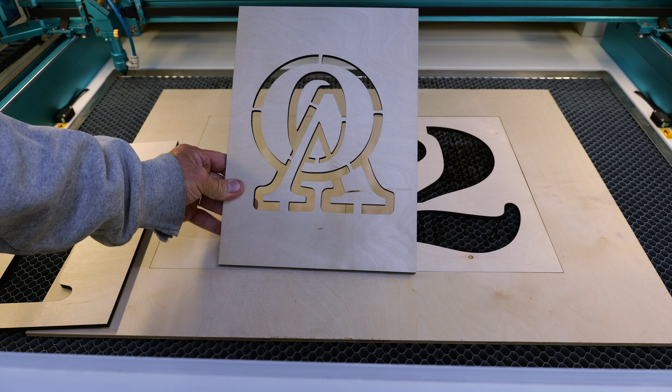The other thing I did was make a small logo that they could certainly put in here if they wanted. One thing I'll show you quick in LightBurn is how you take a logo or design and make a stencil out of it. The trick is you've got to put all these supports in, so when this is all cut out and you pick it up, it all stays intact. This is made out of 1/4-inch Baltic birch, and it seems to work out really well. You just need to make sure they know to store all this stuff flat, because if it gets warped, it's not going to do anybody any good.

So let's jump into LightBurn. I'll show you right quick what I had to do to this original design to turn it into a stencil, and that way you can give it a try.

So the first thing we're going to talk about is how to take a graphic and turn it into a stencil. This is a graphic that I normally use for all their water bottles and engraving other things. But when you make a stencil, you have to modify your existing graphic, otherwise when you go to cut this out, it'll all fall apart on you.

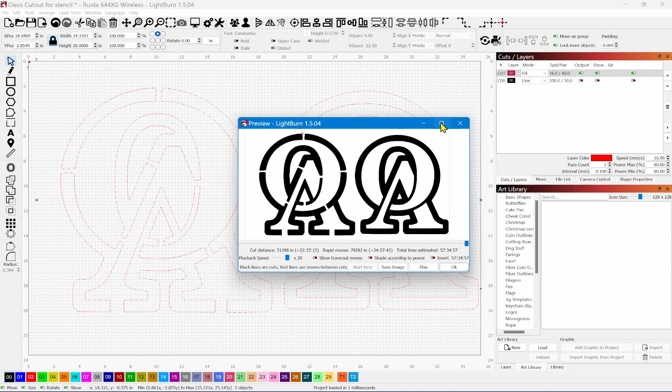I'll demonstrate that this way. If we highlight this, and I've just changed this to fill for demonstration purposes, we'll go ahead and look at both of these in a preview window. What you'll see is this is the way the school graphic came in. This is what I use on their sports bottles, that kind of stuff. Great for engraving. But if you tried to cut this out, what's going to happen?

Because nothing's connected to the outside. Just imagine that you're setting this graphic on a piece of wood. If I cut this out, this O would drop out, this piece would drop out, all of the parts in the letter A would drop out because it's not connected by anything.

So in order for you to do this and for this to work, you've got to understand how stencils work. I thought I'd show you what I had to do to this graphic over here in order for it to become a stencil, to where you could go ahead and cut this out on a piece of quarter-inch plywood or whatever your choice is, and this graphic stays together. The secret is to make sure that it's all connected from the outside to the inside.

So the best way to describe this is what I did: I just did some node editing and created these bridges. Basically I can go from the outside to the inside, to the inside, to the inside. You can see that all these pieces are connected, usually in multiple areas. There's no way I could just do one bridge for the O. I needed to support it in 4 different places.

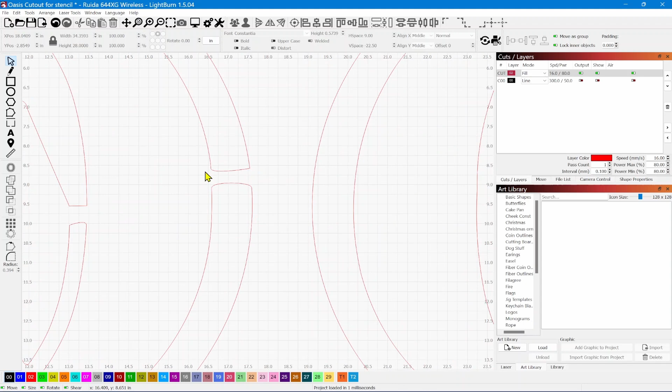So you notice that we're always connected, and all I've done is cut this and added a line, and did that all the way around. That's really the best, easiest, fastest way to create a stencil. Once you do that, then you're in pretty good shape.

The next thing that I needed to do was to create the template and the set of numbers. Let's jump into another file and I'll show you how I did that.

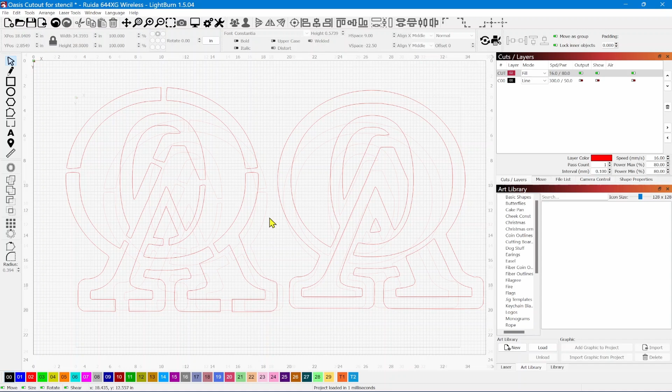Before we get going, I thought I'd show you just a quick demonstration on what this node editing looks like before we get into the numbers. So I'm going to zoom in. This is the after, this is the before.

So if I wanted to add a bridge on this graphic right here, rule number 1 is it can't be grouped. You'll notice that I click on this, I've got the little dashes and dots. I've got to ungroup this. I'm going to come up here and select that. Now this graphic is not grouped. Now I can go ahead and node edit it.

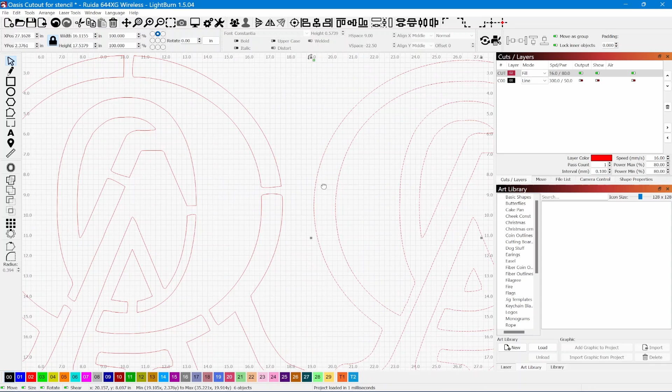If I wanted to create a bridge between this section right here, what I'm going to do is select the outside ring, come up here to the node editing icon, and type the letter I for insert. It's going to put a node right here. I'm going to come down here, type another letter I, and then go ahead and delete the stuff in the middle. So I'm just going to go ahead and get rid of that.

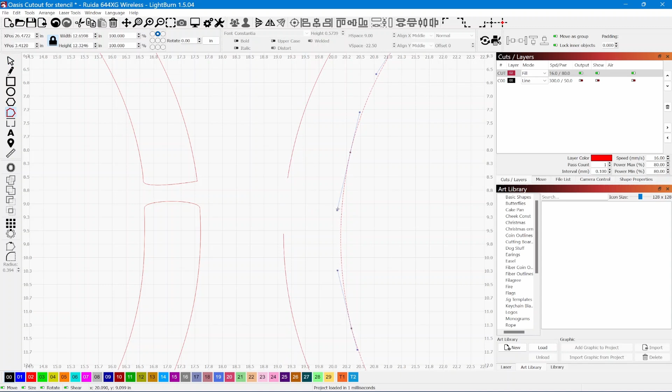Then I'm going to come over here, go back to my selection tool, go to my node editing, hit the letter I to insert a node, letter I to insert another node, come up here, hover over the middle part I want to delete, and I'm hitting the D key for delete. Now I've gotten rid of that section.

Now all I'd have to do is come in here to my line tool, make sure I'm selected red, and then all I would need to do is come in here, select this, and make sure you have your snaps on.

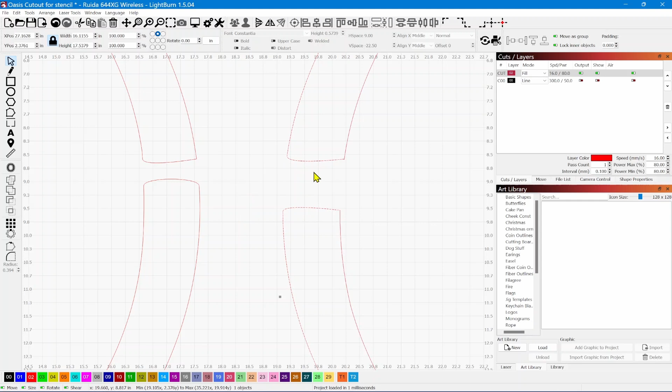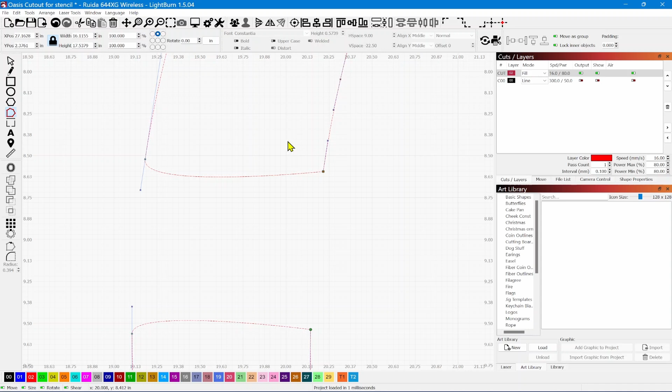And then the last part is probably the most important part. When you do node editing, you've broken these lines, so they're not all one line anymore. And you'll notice that I've got, matter of fact, right here, it's not at the end. So I want to go back to the node editing and grab this little green dot, snap it into place. And what we want to do is we want to make sure that this line is joined with this line. So I'm going to hold the Shift key down, select that line, come up here to Edit, and Auto Join

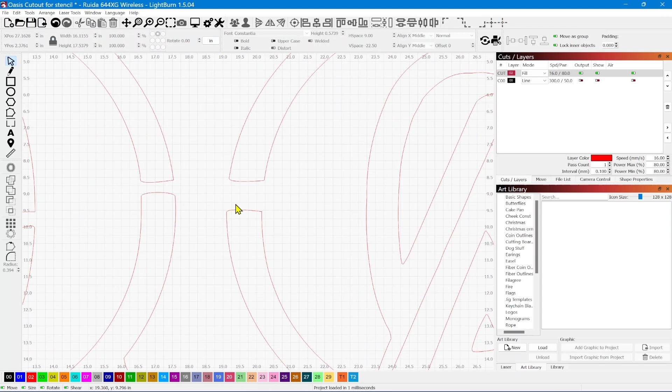Selected Shapes. And now, if I come back here and select it, it's completely selected. And you can see it looks like this is already joined, so we're in good shape. And boom, that's how quick it is to generate a bridge. So if you learn your node editing skills, it's quick and easy.

The thing I love about LightBurn is if you hover over this node editing icon, it'll give you a flyout, and those are all the key commands. Remember, delete is not the delete key, it is the D key. And you can see that right there. So give node editing a try. It's great for stuff like this, and you can modify some really cool stuff. So let's go ahead and take a look at how I generated the numbers and the frame plate for the numbers.

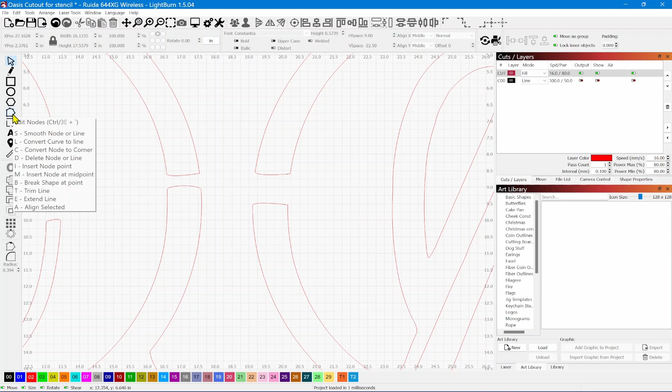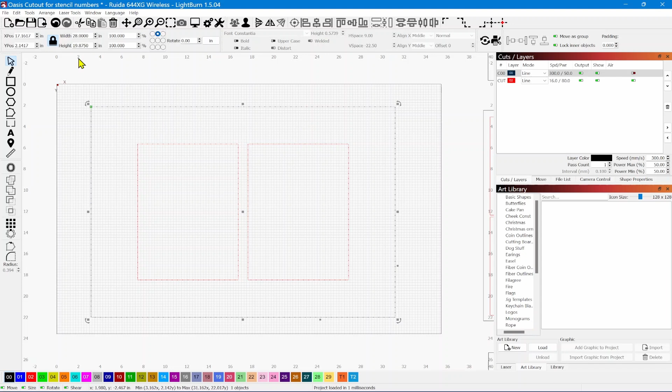Okay, so this is how I generated the template for our numbers that we need. And the first thing that I will tell you, I'll turn this on so you can see it. I had quite a few pieces of 1/4 inch plywood that was cut in this dimension that were already pre-cut that I had on a previous project, and I had some extras, and so I wanted to use them up. And so you can really dictate whatever size makes sense to you. I talked to the coaches to make sure they were going to be happy with the size of numbers that I generated, and all I did was come up with a size of number, put 2 in the middle, and

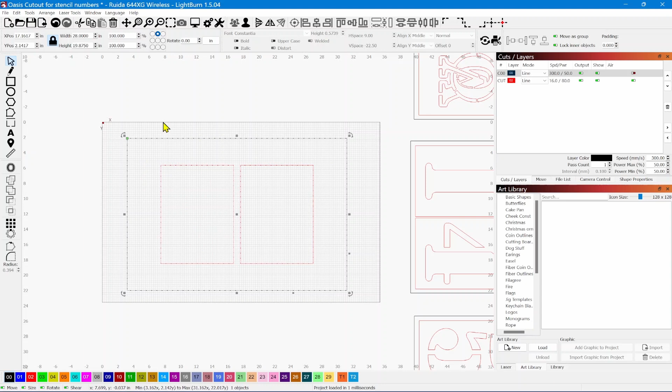what this is designed to do is you drop the numbers in these cutouts, and that way they've got a buffer, so when they spray paint this on the field, they don't get a bunch of overspray on the field that they've got to deal with. This keeps it nice and clean. And so what will happen is I just took a number of whatever size numbers you're going to generate, place them on the pieces of wood that I had, find some stencil numbers that work well for you, and then just drop them in the center.

And at this point, all I'm doing is cutting out these numbers from this larger piece of plywood. I also, like I'll show you, I made a blank one in case they want to do single numbers, and you'll see here in the video in just a minute how I use this. And then I also made a small logo just in case they needed one. So I'm providing numbers 0 through 9 so they can go ahead and use whatever number combination they need, and they can go from there. So that's really all there is to it. There isn't too much magic to this.

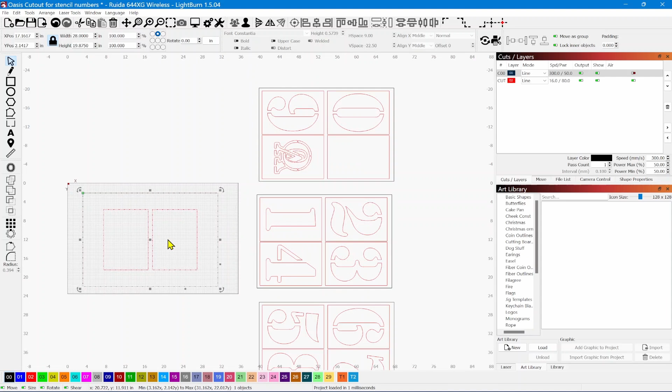Usually I use the same dimension for this as I did for these cutouts. That way they just drop right in and it works out really well. And really that's all there is to it. Once you get these generated, of course, this is not going to change, maybe the school logo, but that's going to be it. And you can crank out a bunch of these number stencil kits for your softball and baseball teams, and they can do real well for you. So give it a try on some of your teams, and you never know. Like I said, all of a sudden they might want water bottles, bag tags, you name it, that kind of stuff. And usually once one school starts doing this and they see it, a lot of the other schools will follow.